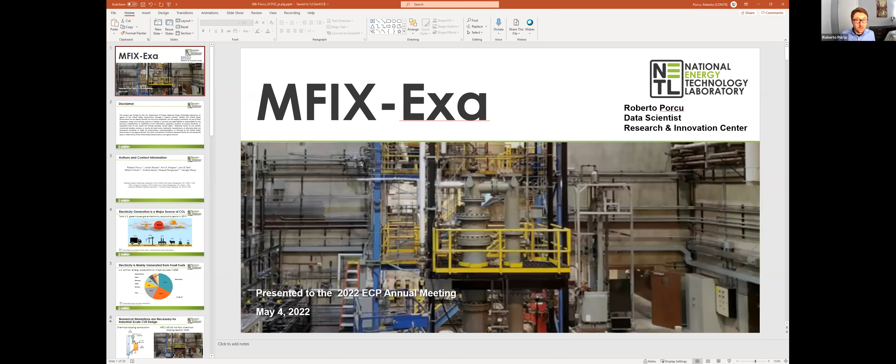Okay, and we'll start. Okay, so hi everyone. My name is Roberto Porcu, and I am a member of the team that develops MFIX-Exa, which is a solver for chemically reacting multiphase flows in complex geometries.

I would first have to say that this project was funded by the United States Department of Energy, NETL, an agency of the United States government, through a support contract. And the views and opinions of the authors expressed herein do not necessarily state or reflect those of the United States government or any agency thereof.

In the work I'm going to present today, I would like to thank Jordan, William, and Deepak from NETL, and John, Andrew, and Henji from the Lawrence Berkeley National Lab.

So to motivate our work, I want to show data from the United States Environmental Protection Agency that shows how back in 2019 - though today the situation is probably much different - one of the top economic sectors for total greenhouse gas emissions in the United States was electricity generation. And in the greenhouse gases, 80% is constituted mostly by carbon dioxide.

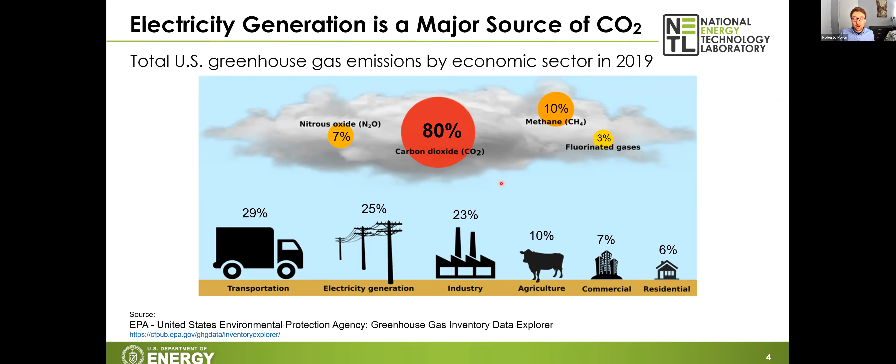Focusing on electricity generation, if we check data from the United States Energy Information Administration, we see that the major sources for primary energy production in the United States come from fossil fuels, mainly natural gas and crude oil, used in power plants. The problem with burning fossil fuels in power plants is that the carbon dioxide produced by combustion is mixed with many other gases, which makes it hard to sequestrate carbon dioxide before it gets into the atmosphere.

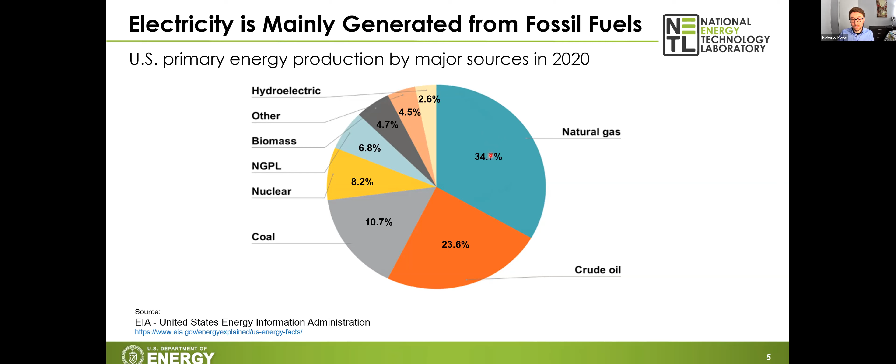So there are some solutions, and one solution is represented by chemical looping reactors. In chemical looping combustion, the carbon dioxide produced by burning fossil fuels in the fuel reactor is mixed only with water vapor. This makes it much easier and cheaper to sequestrate carbon dioxide before it gets out into the atmosphere.

Chemical looping reactors are being developed. We have at NETL a 50 kilowatt hot flow chemical looping reactor. The problem is that when we scale them up to industrial scale, we don't see the efficiency that was expected. So there is still a need for research and development.

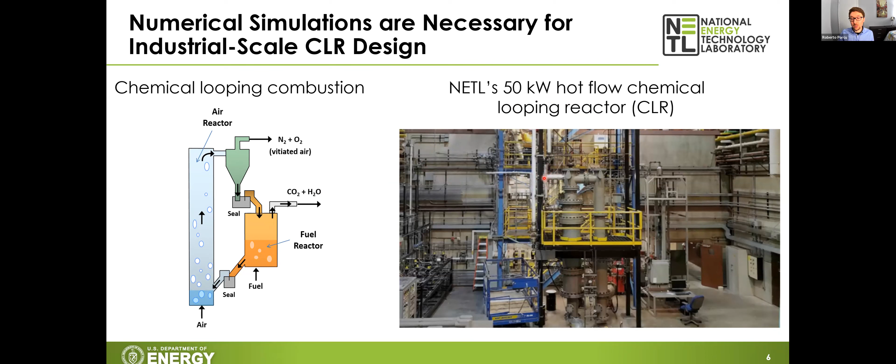And part of the research for chemical looping reactors is represented by numerical simulations, and MFIX-Exa wants to play a fundamental role in this sense. So if we go back to when we started, back in 2017, we were able to simulate a smaller scale chemical looping reactor with cold flow, and a few minutes of simulation were taking a lot of time.

The computational cost was not that big. For example, particle count was about 60 million. But the objective is by 2026 to be able to simulate a few minutes of a real scale industrial chemical looping reactor in a few days on next generation exascale supercomputers. At this industrial scale, the computational cost will be very high. For example, we imagine having hundreds of billions of particles to be simulated. These are estimates, but more or less this is what we expect.

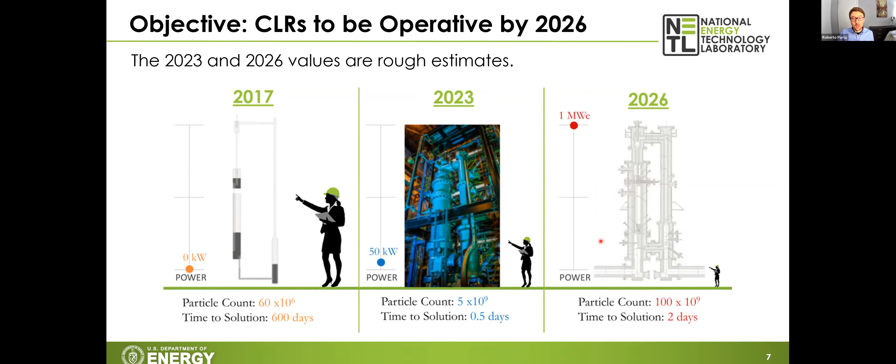So MFIX-Exa is a CFD-DEM code that solves chemically reacting multi-phase flows in complex geometries. We first solve the fluid phase, modeled using a particle unresolved multi-component low Mach number formulation. During the fluid update, particles are kept frozen in their quantities and positions.

Complex geometries are modeled through an embedded boundaries approach. For spatial discretization we use the finite volumes method, and a Godunov scheme for time integration of the fluid phase. We solve a system of equations composed of the Navier-Stokes momentum equation in convective form, together with conservation equations of mass, species mass, and enthalpy. We can either simulate an incompressible fluid or an ideal gas, in either open or closed domains.

After solving the fluid phase, we update the solid phase, aka the particles. We model particles using a soft sphere spring dashpot model, updated in time using a forward Euler scheme with subcycling, so we do several particle time substeps within one larger fluid time step. We solve a system of conservation equations for mass, linear and angular momenta, species mass, and enthalpy.

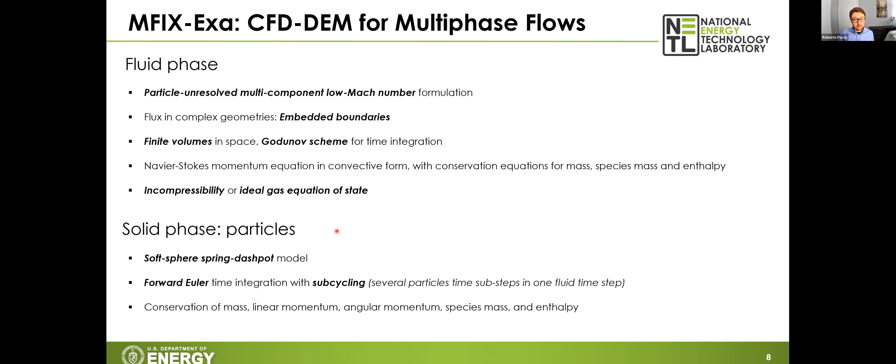MFIX-Exa is empowered by AMReX, meaning we implement a hybrid parallelism approach. That means we have a multitasking plus multi-threading implementation, where the multi-threading typically means we offload the work to the GPUs whenever it's possible.

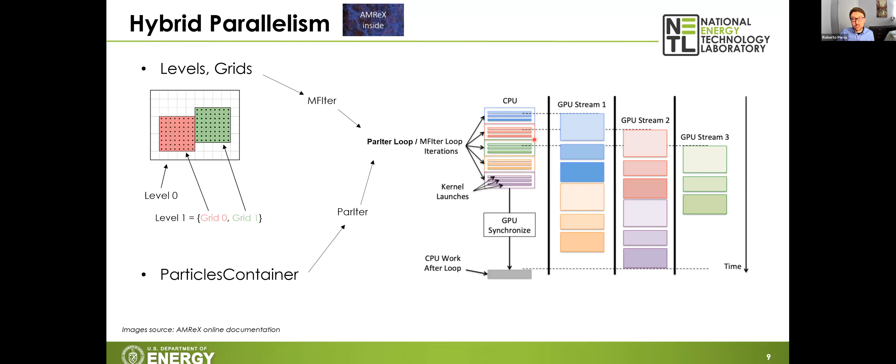AMReX's GPU strategy focuses on launching GPU kernels into multi-fab iterator and particle iterator loop iterations. This means the GPU work is isolated to independent datasets, which can be further parallelized using different GPU streams of execution, giving the possibility to use the GPUs at their best, optimizing GPU usage.

Now I'm going to present some of the improvements we've implemented in MFIX-Exa in the past months and years. In this slide, I'm presenting improvements we made during last year's GPU hackathon, in which we participated. The first change was to pass from an array-of-structs layout to a struct-of-arrays layout for particle data storage.

This greatly improved the coalescence issues we had, because accessing GPU global memory and storing it with a struct-of-arrays layout reduces the problem of uncoalesced accesses.

We also reduced the checks we were doing for particle collisions. What we do in general for checking particle collisions is compute a list of neighbor particles for a given particle - all those particles that lie within a given distance from its center. We check for collisions only with the neighbor particles. This neighbor list is updated every fixed number of subcycles, but in general we only check for collisions with neighbor particles, which of course improves the computational cost since we don't check collisions against all particles, only the neighbor ones.

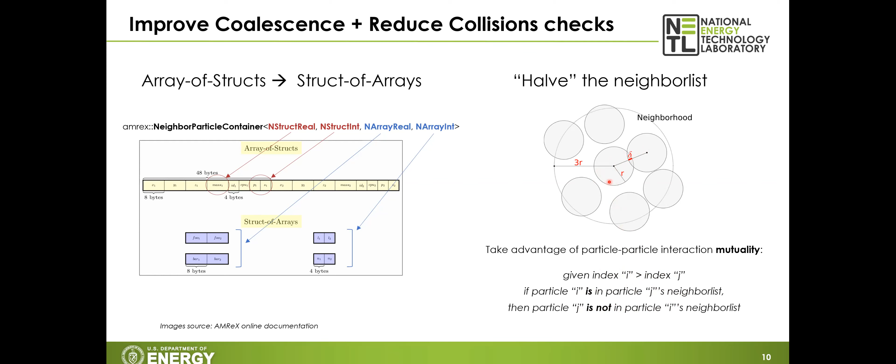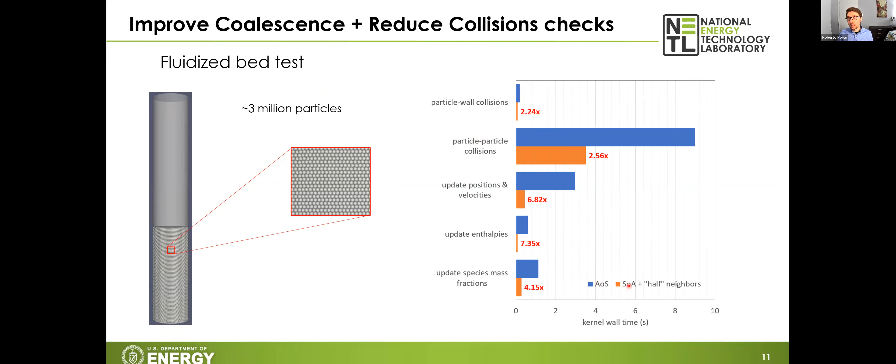This reduces the amount of collision checks we have to do, and putting this together gave us a very good performance improvement. For example, in this fluidized bed test with about 3 million particles on one GPU, we observed very good speedups in all the different kernels that update particle quantities.

In blue is the old implementation, and in orange is the implementation with the two improvements we implemented. In the recent months, Henji implemented two very good improvements as well. Actually, three.

One improvement regards implementation of a greedy algorithm for improving the load balancing with dual grids. The greedy algorithm tries, for the particle grids, to balance particle counts among GPUs while at the same time minimizing the communication between particle and fluid grids.

In this picture, you can see that while we keep the particles local to the fluid grids whenever possible to minimize communication between particles and fluid grids, we also try to assign particles to underloaded GPUs to balance the amount of particles among the GPUs.

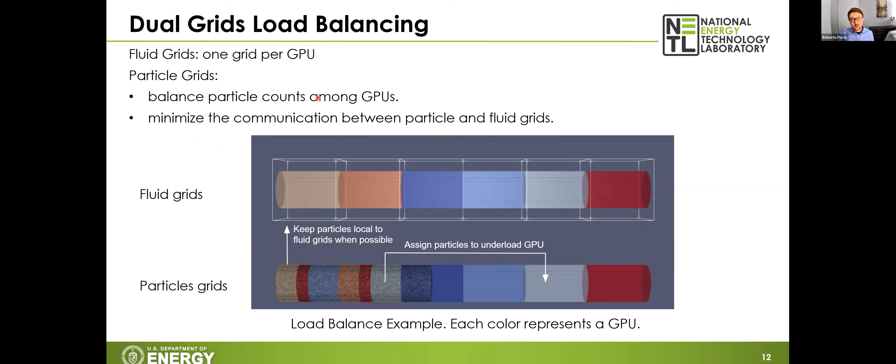So this was one of the improvements that Henji implemented. The other two improvements were actually regarding reducing particle communication costs.

Henji realized that we were communicating all the particles lying inside the ghost regions. Instead, we only need to communicate those particles that are in the ghost regions but belong to the neighborhood of the particles in the destination grid, because we only need those particles to compute particle-particle collisions.

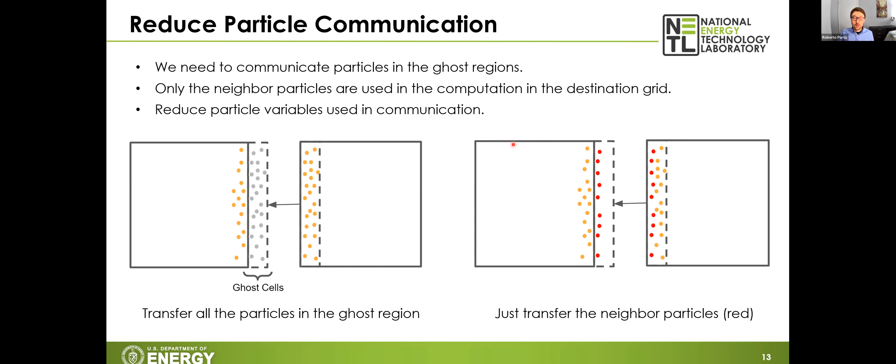This drastically reduced the amount of communication needed. He also found out that we were communicating some variables for particles in the ghost regions that were not used for particle-particle interactions, so reducing the number of variables communicated helped improve performance as well.

He ran a performance evaluation on a riser with 18 GPUs and found that, for example, in the initial configuration where we have only one grid for both particles and fluid, all the particles are in a few cells, so the particle distribution is very imbalanced.

The baseline simulation was showing a very imbalanced computation, communication, and other costs, and it was taking longer than the optimized simulation he ran, where all the different optimizations gave good speedup. The optimization with all three fixes Henji did showed speedup higher than 3.

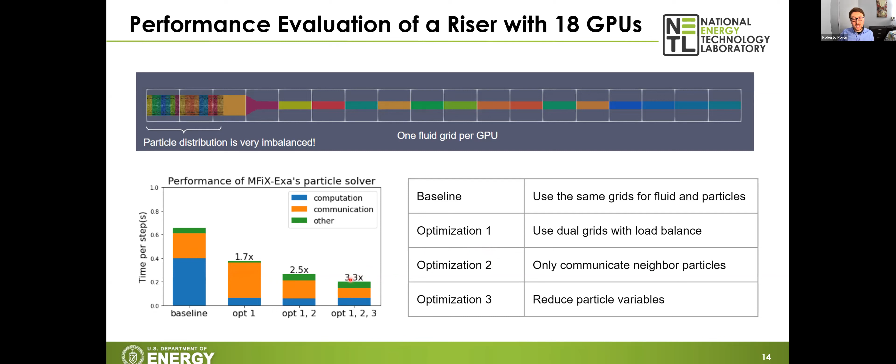Henji's implementation also showed much better weak scaling analysis on both Summit and Crusher. Labeled 22.02 is the version of AMReX previous to merging Henji's implementation into the main development branch, and 22.03 is the version after we merged Henji's changes. You can see how the results on both Summit and Crusher improved, with very good scaling results.

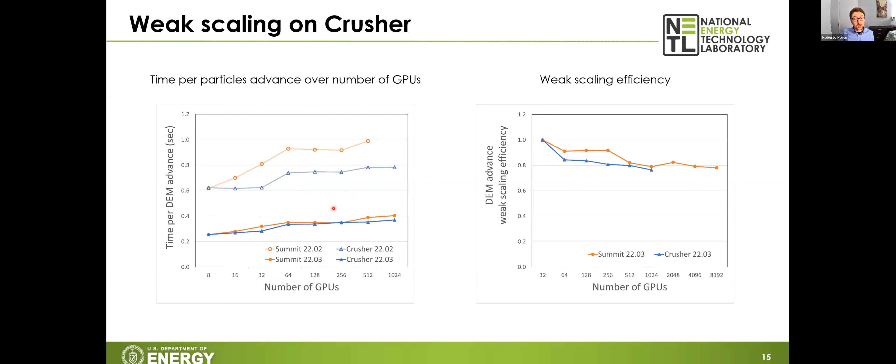Now I'm going to present some numerical results for verification and validation of MFiX-Exa simulations. In this slide, I'm presenting results where we try to replicate the simulations done by Jordan in his work from 2015.

In the left picture, I'm showing the profile of a particle, a water droplet temperature over time. The water droplet is evaporating in a humidified airstream, while on the right we have water vapor condensing on a droplet in a humidified airstream.

In both cases, the profiles, both for the droplet temperature and the energy sources, are in very good agreement with the results shown by Jordan in his paper, and they're also in good agreement for the condensing case with the experimental data we got from the work by Kulic in 1976.

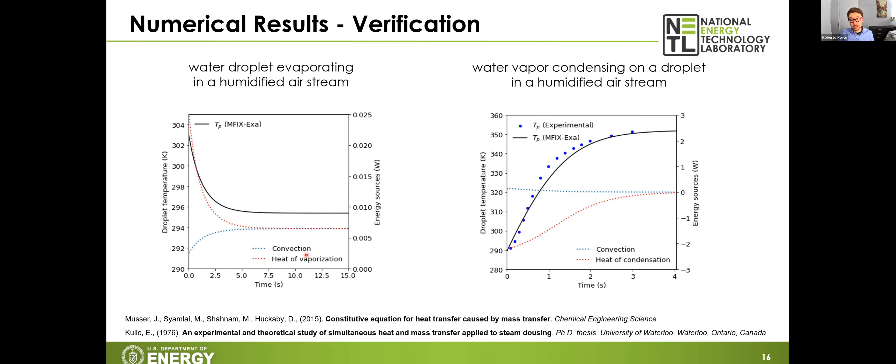Another test for verification was run by William. He got the work from Schumann, who found the exact analytical solution for a monodimensional case of transient heat conduction in packed beds.

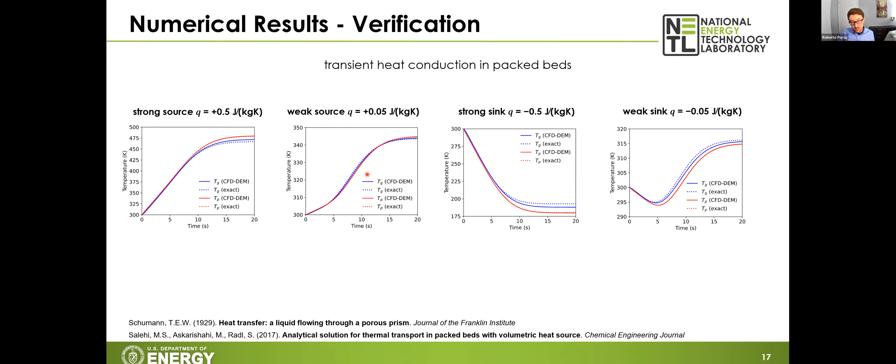Finally, as a validation test, I want to show the results that William ran. He got experimental data from Patil, a test about a fluidized bed. What Patil did in his 2015 work was get experiments of a fluidized bed where the particles were glass beads heated up in an oven, and after reaching a given temperature, they were immediately put in a fluidized bed with a flux of nitrogen cooler than the particles, cooling them down.

You can see for a light configuration and a heavier configuration, where light and heavy refer to the mass of the simulated particles, we observed very good agreement between the experimental data provided by Patil, obtained using infrared imaging, and our simulated values of particle temperature averaged over the entire domain. We observed very good results in this case as well.

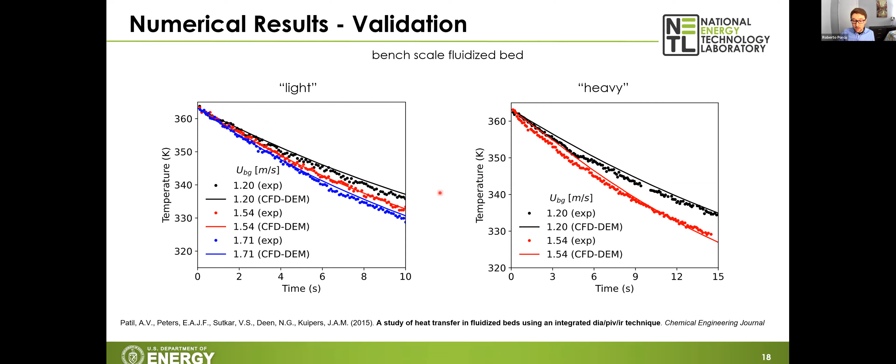So yeah, thank you for your attention, and I'm available for questions if anyone has any.

All right, thank you, Roberto. Yes, I have to stop sharing my screen. Well, you can keep it up in case someone needs to refer to some slides. Does anyone have any questions for Roberto?

A quick one, maybe. Near the beginning, you talked about cutting the search in half by understanding that if you found particle I interacting with J, you'd have to do the reverse. Is that a capability that's now part of AMReX search? Is there an extra special kind of search for that, or did you do something special with the return of the search?

Yeah, that's a good question. When we use the AMReX neighbor particle container, when we compute the neighbor list, we pass a function that computes the neighbors depending on whatever you want. It's a class with an operator that returns whether a particle should be in the neighbor list or not. For example, if the distance of a particle is below a given distance from the center of the other particle, then that particle is in the neighbor list or not.

In the same operation, we can also check if the particle that is supposed to be in the neighbor list has an index smaller than particle I's index. In that case we put that particle in the neighbor list, otherwise we don't. So with this check, one particle ends up in the other's neighbor list, but not the opposite. It's something we did in AMReX, but it's very easy to implement because AMReX makes it very easy to do.

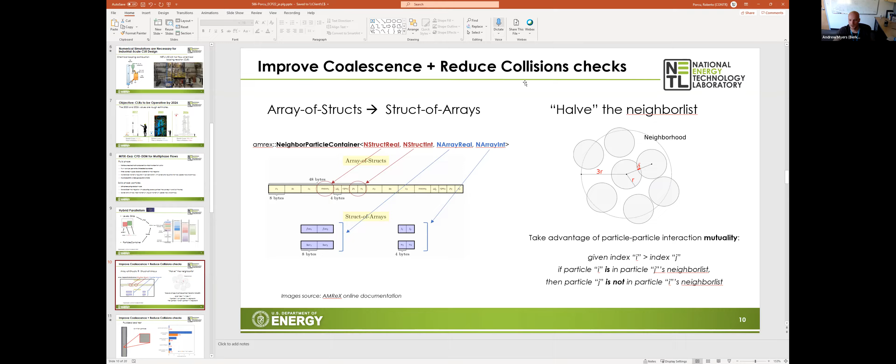Cool. Yeah, any further questions for Roberto? All right, if not, next up is you, Mark. Also, you're muted. Yeah, I think you're muted, Mark. I can't be. Oh, there you go. Okay, now I have to go once a week and be told that I'm muted. I think we all do that, but maybe I get a little bit more. Thank you.

So, yes, I was asked to give a summary of the Pele project, and I was left a little bit to interpretation. I knew that there'd be a fair number of people in the audience that already knew a lot about the application. So I was a little unclear about what to talk about. We'll see how it goes.

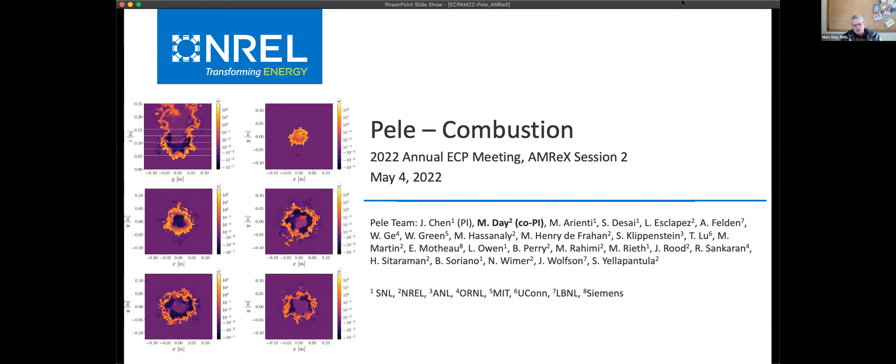First thing is the Pele team is getting to be a pretty large group. Some of these folks worked on the Pele project for just a year or two in the past, and some are just starting up. I don't think that represents how many FTEs are in the project, but just how many people had their fingers in the pie here.

Pele Combustion Suite. Pele is Exascale's application suite for high fidelity detailed simulations of turbulent combustion, both in open and confined domains. The idea was we wanted to create a numerical capability that included enough detailed physics and geometrical flexibility to be able to evaluate the design and operational characteristics of a number of different types of combustion devices for automotive when we first started, but now expanding into industrial and aviation applications.

So in order to do that, we had to target a range of simulation capabilities, which I'll go over by visual aid with the picture on the right. We're trying to include enough physics to be able to inform the next generation combustion technology design. And just some examples of the sorts of devices we're looking at.

The first one is the RCCI, reactivity controlled compression ignition engine, which is part of our KPP2 challenge problem for the ECP project. But also we're interested in things such as supercritical CO2 power cycles, interesting looking rotating detonation engines, supersonic cavity flame holders, and again, more recently looking at aviation combustors for sustainable aviation fuels.

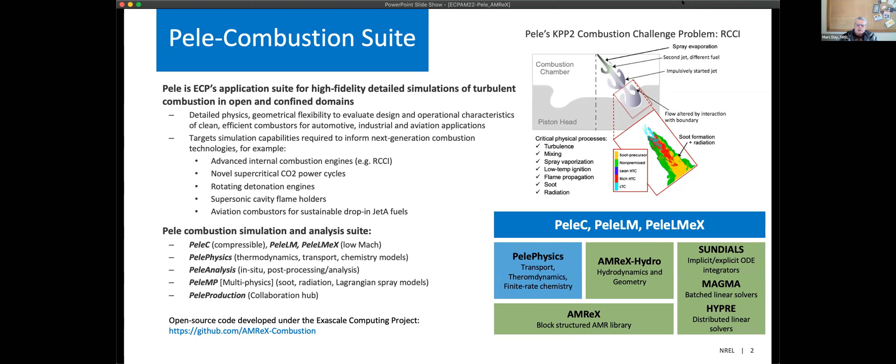Looking at the integrator codes, the simplest of the three is Pele C. That's a compressible flow solver for conservation of species mass densities, momentum, and total energy. It's based on a time-explicit Runge-Kutta variant for diffusion and hyperbolic terms, coupled with the Sundials-driven ODE integration for finite rate chemical kinetics.

Depending on the regime we're looking at, we might want to do an implicit or an explicit integration. Depending on the machine we're operating on, it depends on a lot of factors. We're still trying to quantify which ones are most efficient and which combinations underneath work best. I'll talk a bit more about that in a minute.

Pele Physics will then supply to Pele C everything it needs to actually evaluate the physics models, including the transport coefficients, the equations of state, all that stuff. Then you can wrap Pele MP over the top, which you can use to push particles through the system, and then they might react.

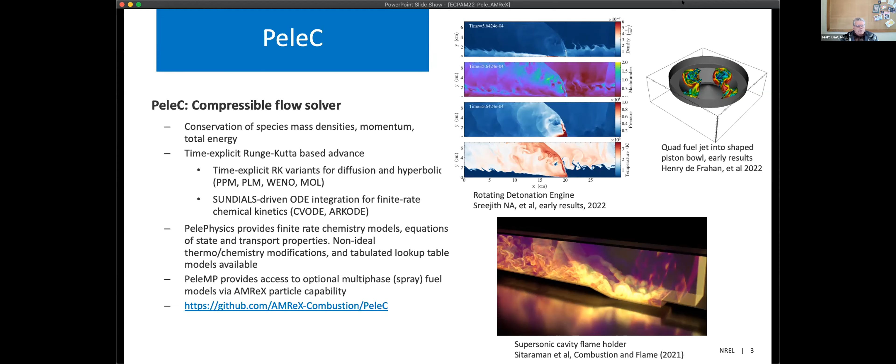Pele LM and Pele LMeX are written like that because they're both very similar codes. LMeX was derived from LM, but they're different in a key way. Both solve the low Mach number flow equations for conservation of mass densities, momentum, and enthalpy. The larger time steps enabled by a low Mach number approximation require more attention to the coupling between diffusion and reactions. So we've devised an iterative implicit spectral deferred corrections variant of a time stepper.

We couple these things together nicely when we take big time steps. Time steps are big enough that we can't do explicit diffusion anymore, so we do a Crank-Nicholson-like step. The hyperbolics are based on BDS, Godunov stuff, and I'll make a comment about what BDS stands for and its purpose in a minute.

The chemistry is again driven through Pele Physics, using Sundials to integrate the equations. More often than not, the time steps are big enough that we have to do an implicit scheme in order to get the chemistry to solve in my lifetime. You end up taking hundreds of thousands of time steps, and if you have to do it explicitly, that'd be bad.

The critical aspect with Pele LMeX, and the reason there are two lines of development, a low Mach and a compressible version, is that to integrate the low Mach number system, we have to solve a linear elliptic system to get the projected or constrained velocity field that satisfies a spatially constant pressure field. We also have to solve a set of linear systems to do the implicit diffusion solve. So Pele LMeX turns out to be a lot more complicated than the compressible version because it involves solving these linear systems.

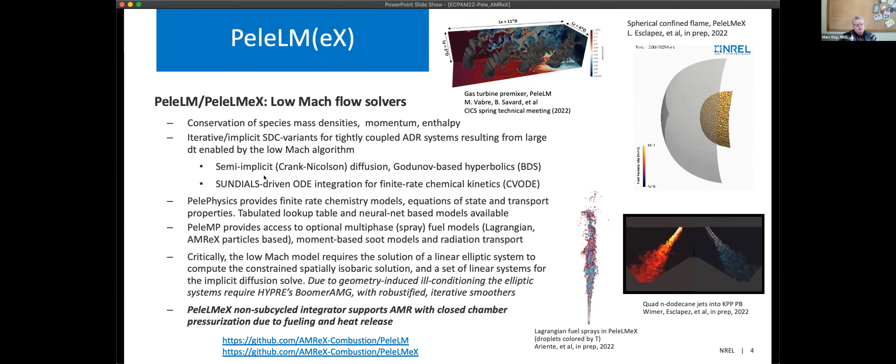We could run problems where we're injecting sprays into a closed domain with a funny shaped piston head. The jets go into these things and mix, doing some nice turbulent mixing. So we have a lot of the components in place, and now it really is about scaling the system up, robustifying the linear solvers, and getting all the pieces to hang together. So those are the three main codes.

I'll give a couple more comments about Pele Physics, which talks to all three of them. Pele Physics is itself an open source combustion physics library. It has everything necessary to get the behavior of the gas system from the equation of state. The equation of state might be an ideal gas mixture, a non-ideal one for looking at supercritical flows, or even EOS lookup tables. Pele Physics supports them all, and the codes that use it support them all.

Transport coefficients can be mixture averaged, which is typically the model we use. We're interested in, say, hydrogen diffusing faster than some heavy species - that makes a difference in how our flames propagate, and we want to be able to capture that. But then there are simplified models like a unity Lewis number transport property where there's no variation over space.

So there are various simplifications. And finally, the chemical reactions themselves, finite rate chemical expressions, are typically specified in the combustion community using this Chemkin formalism. We have a Python code generator that spits out code that builds on CPUs or GPUs for efficient evaluation of those.

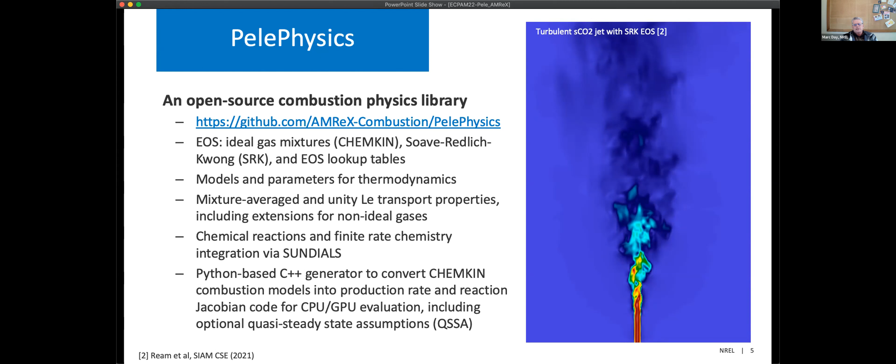This includes the ability to handle things like a quasi-steady state assumption, where some species, instead of satisfying ODE expressions, satisfy algebraic expressions saying their creation rate equals their destruction rate. So the concentration of one of those species becomes an algebraic relationship you carry through the evaluation of the rate term - a nice way to reduce the dimensionality of the system by making approximations to the chemistry.

I made reference to lookup tables and other ways to evaluate equations of state and chemical reactions, and here's why one might want to do such a thing. In many chemical systems, the dynamics might involve hundreds of chemical species, but when you look at the dynamics of the system, it turns out you can pretty accurately describe them with a much lower dimensional chemical space.

The coordinates of those chemical spaces are often some linear combination of the normal variables you would use. Instead of evaluating very complex finite rate chemical reactions, you can store the relationship between the bases in this reduced manifold space and the effective production rates. You can store that in a neural net.

The use case here would be: you do some very complicated, expensive simulation, but keep track of the data involved. You could store the chemical space accessed during those runs in the form of a very reduced neural net, and replay those calculations with maybe different boundary conditions. As long as you don't go too far from where you did the original calculation, you can redo these calculations in a much lower dimensional space, 2 or 3 dimensions rather than say 100 dimensions. So there's good advantages to that.

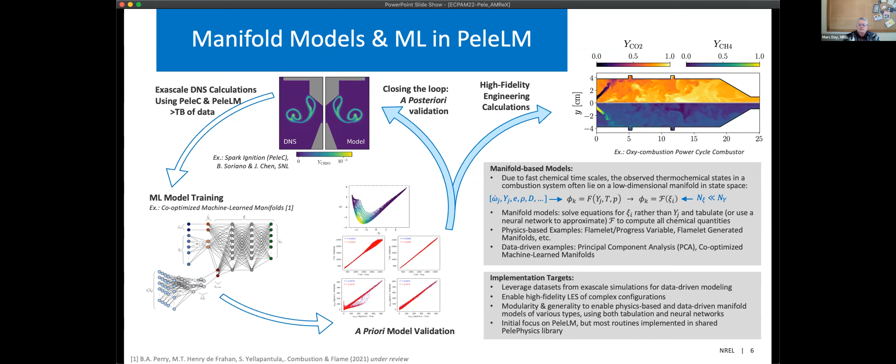This is going to become useful post-ECP, when we have to do a lot of engineering calculations in parts of the domain of parameter space that are fairly limited, but we need to do a whole bunch of iterations to do optimization and things like that.

Anyway, back to the code. The numerical methods used in Pele are similar to a lot of other AMReX applications. We extensively leverage the AMReX library, including the data structures, the communication patterns and tools, the description of how parallelism is handled, and in particular how the GPUs are accessed.

All of our discretizations are based on cross-refinement finite volume methods to conserve mass and energy.

We talked about the subcycling. Pele C and Pele LM subcycle in time to maintain typically a constant CFL across the AMR hierarchy, whereas PeleLMeX tends to run with a single time step across the hierarchy. They have different advantages to the algorithm, namely the low Mach number code's ability to handle closed chambers.

I mentioned in passing earlier that the Pele analysis suite contains some tools. Here's some examples of what they are. They're typically AMR aware, so they understand how the grids are nested and the high dimensional space. They provide tools to extract isosurfaces, slices, streamlines, stream tubes, to be able to incorporate high dimensional sampling and statistics, to do some analysis in the chemical space, including CEMA, which is chemical explosive mode analysis.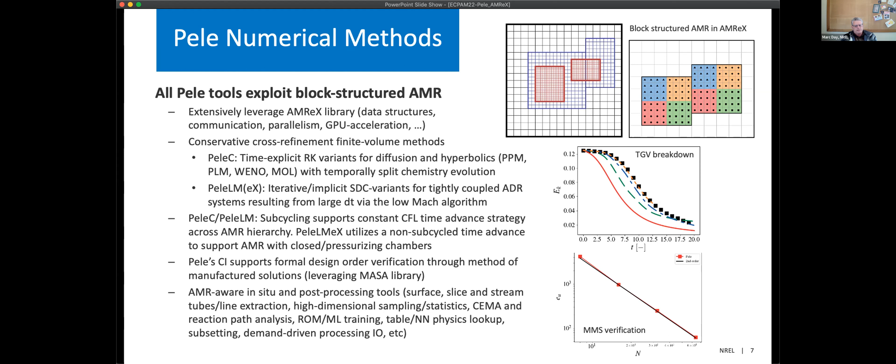I made reference to the geometries being incorporated with AMReX's embedded boundary stuff. In general, AMReX provides functionality for arbitrary domain boundaries, internal and external, in 2 and 3D, providing some tools to generate these things: some simple shapes, more recently some constructive solid geometry, ways to pull things out of CAD packages and create geometries from that, or create surface meshes and use that to create AMReX's description of the geometry.

Those last 2 things are in development, in testing, and eventually will be a critical part to us being able to apply this post-ECP to more complex general situations.

But other than the generation, you have the data structures, augmentations to the logically rectangular stuff that normally comes with block structured AMR, but the augmentations allow you access to things like the apertures of the faces, how much is exposed to the fluid versus how much is covered, and also abilities to create numerical PDE operators like gradient and divergence and such. This is all kind of standard AMReX stuff.

In these cases, what happens is, as shown by the picture, as mentioned in earlier talks, the regular cells are cut or completely covered by the EB, and the corresponding stencils have to be locally modified near that boundary to account for partial obstruction of the faces, partial obstruction of the volumes.

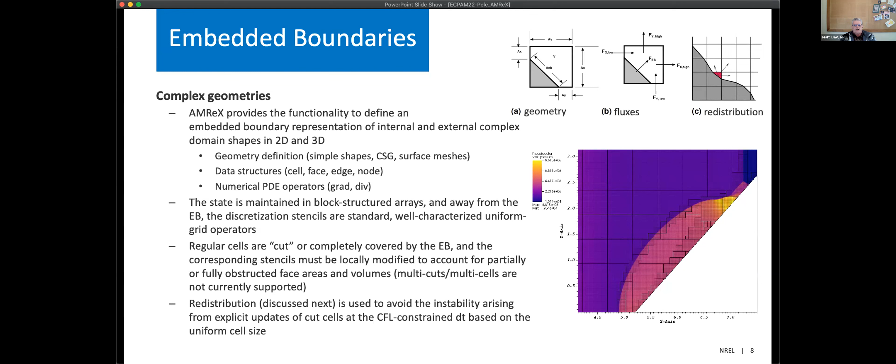Redistribution turns out to be a really important aspect of this because those cut or small cells will have an instability for time explicit integration of things, when you're trying to time step at a DT that was based on a CFL constraint that was based on the full cell. So if you get little tiny cells, you're going to have instabilities, and redistribution is a way to manage that. So I'll make a couple of comments about that.

Again, redistribution is used to robustify the conservative update. So what you do is you involve the small cell and a couple of its neighbors, so you end up getting kind of a bigger area to work with. It has a way of helping you get around the instabilities, but it also involves a bit of art. So you have to decide, when you do this redistribution, which cells do you want to involve in such a procedure, and how do you want to weight the redistribution of mass or energy to do this.

AMReX provides a number of different methods they have over the years. I think they're narrowing down, but specifically for the combustion application for complex reacting flows, we find that we're evolving mass fractions, and we need those mass fractions to stay between 0 and 1 during evolution, or we're in trouble. So sometimes if you're doing kind of a gamma law gas or some idealized system, maybe you have overshoots and undershoots, maybe you can just clean them up. But in the combustion problem, we have to evaluate transport coefficients, thermodynamic properties, chemical rate expressions.

We can't do that. In addition, the flux interpolation and limiters and some of the other things down in the bowels of the AMReX redistribution schemes could introduce or compound these bounds violations, and that would just essentially make our code crash. So the Pele team has worked extensively with AMReX to develop and test redistribution schemes that preserve these constraints. So it's important to fix those at boundaries.

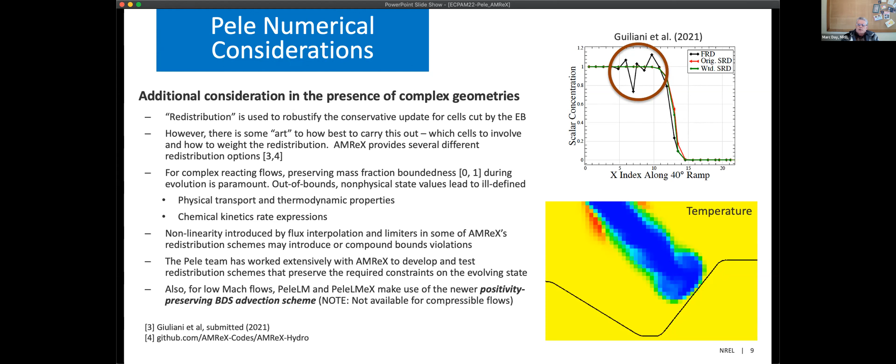So a lot of the work over the last year has been to address this issue and make sure that we can have a nice, robust evolution of our state, no matter how complex the geometry.

I don't want to say much about moving the AMReX codes to CUDA and to GPUs, except to say that in Pele, we spent a fair amount of effort investigating a number of different approaches to doing this, involving things like OpenMP and other strategies of mixed language implementations, trying to minimize as much work as we had to do. Ultimately, for a number of reasons, it turned out going the AMReX lambda-based approach to launching kernels turned out to be the most efficient, turned out to be the most easily readable and maintainable code, and it let us get rid of the multi-language implementation and go to an all C++ framework like most of the other ECP applications of AMReX. So it's turned out to be a big win for us.

Now, let me see where I'm at here to probably get really close to time. We just want to make some comments about the current status of the scaling.

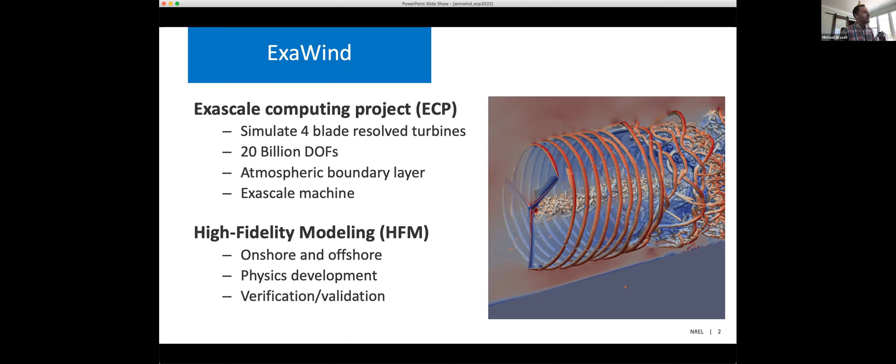So what is AMR-Wind? AMR-Wind was forked from incflo in spring 2020, and it's very similar to IAMR - these are all AMReX codes. They rely on the block structured AMR in AMReX, the performance portability that gives us, and also MLMG. Because we solve incompressible Navier-Stokes, linear solvers are very important to us, so having a scalable, robust solver is good for us.

After we forked it, we started adding stuff to make it different. One of the first things was atmospheric boundary layer physics - things like the Coriolis term and Boussinesq buoyancy and wall models, stuff like that. We've also added actuator lines, multi-phase flow, immersed boundary method, and then this hybrid solver, where we combine AMR-Wind with Nalu-Wind through overset using Tioga.

The AMR-Wind discretization mostly comes from a 1998 paper from Ann Almgren, a JCP paper. It's an approximate projection scheme - the velocity and scalars are all cell-based and pressure is node-based, and it's also staggered in time for pressure. It's discretized using a finite volume method and a Godunov scheme for advection. We also have a WENO-Z variant that we typically use.

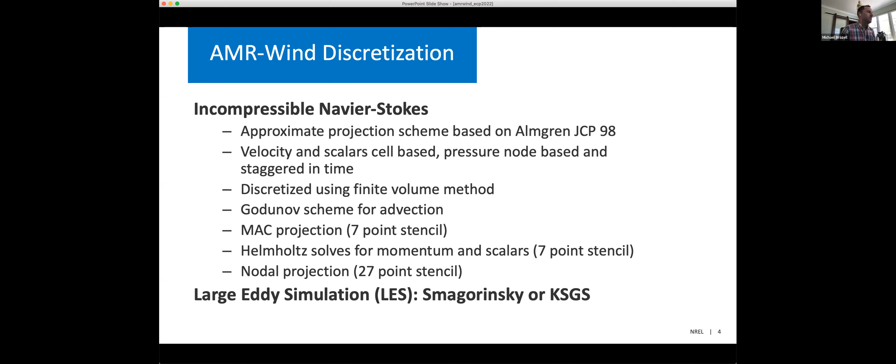Because we're solving incompressible Navier-Stokes, we rely on three types of linear solvers: the MAC projection, Helmholtz solves for momentum and scalar - both 7-point stencils - and then a nodal projection, which is a 27-point stencil. These all come through the AMReX library. In addition to incompressible Navier-Stokes, we can also solve large eddy simulations, either through the Smagorinsky model or by adding an additional equation and using KSGS.

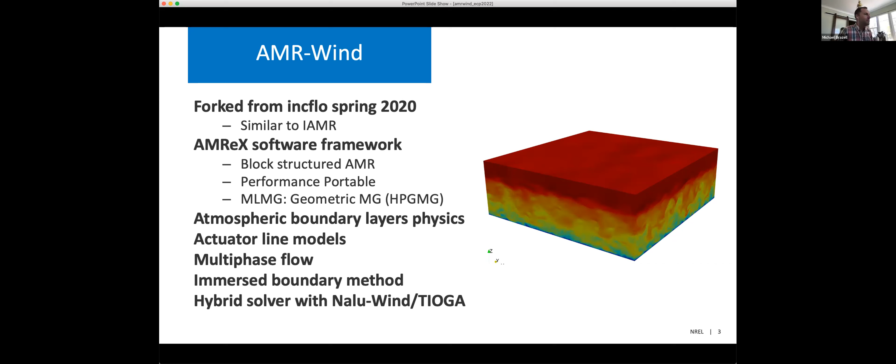What's nice about this case is we compare AMR-Wind to Nalu-Wind to SOWFA and to that Peterson paper, and we have pretty decent agreement. These cases are kind of hard to get good agreement on just because they're large eddy simulations.

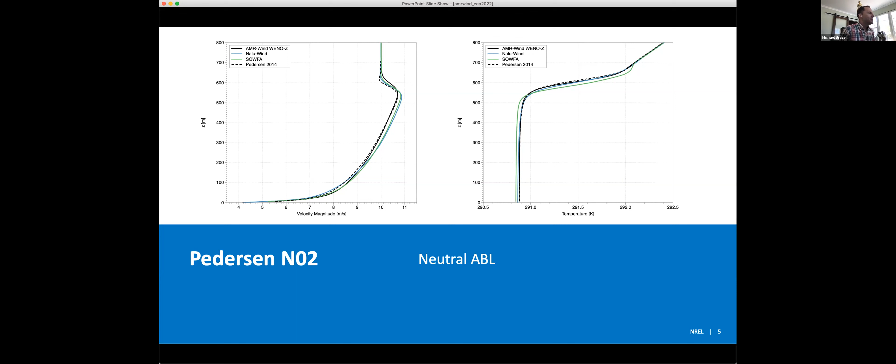Here's a different case we work on a lot, called GABLS. There's a great website I put here, it has all kinds of data from tons of codes. It's really good to compare to other codes.

This is kind of similar, except for this case you start with a temperature profile that varies linearly, and then you cool the ground as the simulation goes on. You can see temperature has an effect on the simulation, and that's partially related to causing this nose to happen. You can see, maybe 200 meters up, this nose.

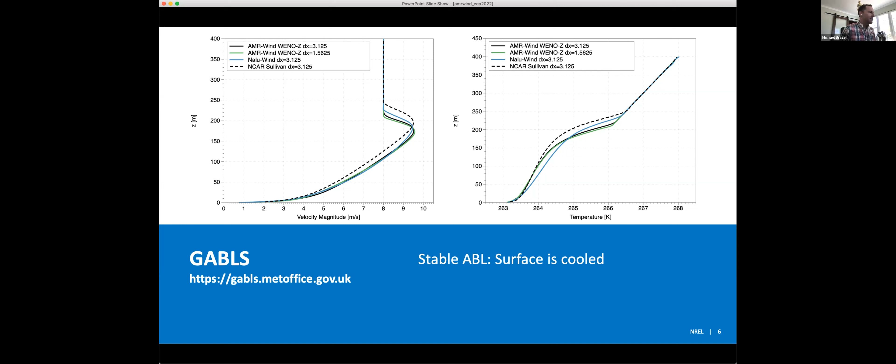So the flow goes faster than the free stream flow that we started at. That's kind of interesting.

We also recently have some multi-phase work, so we added some movies. Movies are always good. Here's a dam break problem. A lot of this work's been done by Yorgos and Michael on the ExaWind team.

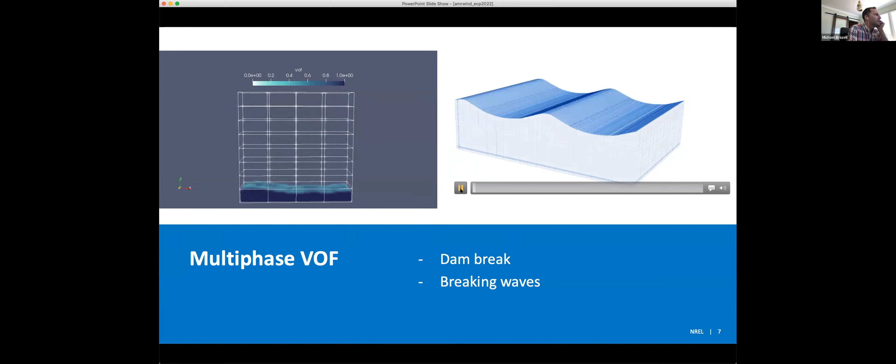This multi-phase work is going to be important later when we start doing offshore wind energy, coupling everything together.

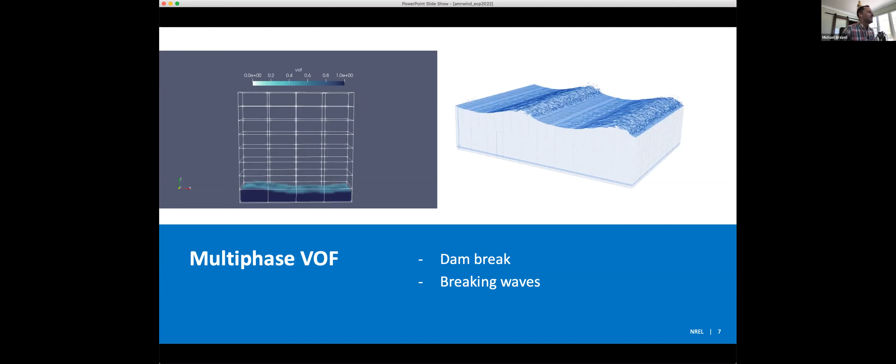I'll quickly talk about some strong scaling. This plot's kind of old at this point, but I still like it because it has two problem sizes, and it has GPUs and CPUs on Summit. You can see that if you do a lot of degrees of freedom per GPU, you get really good speed up compared to CPUs. But when you strong scale them all out, we're still a little bit faster using CPUs. There's just not enough work on each GPU.

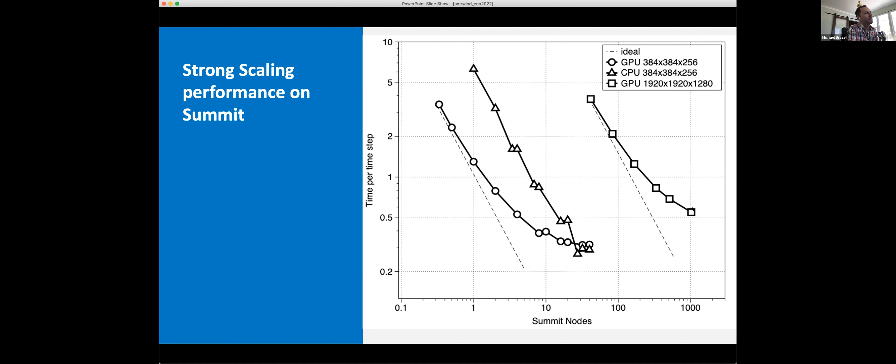This is a fairly big problem out here too, so that's kind of nice to see strong scaling is looking okay.

Here's an improvement over the last year. I just went back a year from April, so new is this past April, and old is April 2021. I changed three things. It's kind of hard to say which had the biggest impact, but of course I updated AMReX in that year.

We also realized, with the collaboration with CEED, that they were doing a different solver for their momentum solves, and they said we should try it. It turns out it works pretty well. We run such a small time step because we're trying to do large eddy simulation, that using MLMG, like a whole V-cycle, is overkill for these. So we've switched to Krylov solvers and just set the max coarsening level to 0, and that's led to some speed ups.

We've also gone from a tensor solve to a multi-component solve, which was just a little tiny speed up. But all three of those things gave us a 1.3x speed up, so that's pretty nice.

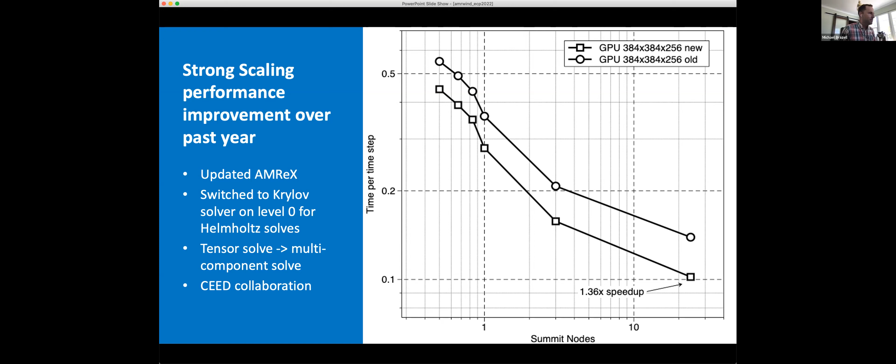Now I'll talk about the hybrid solver. What we mean by that is we're connecting multiple codes through Overset. You can see this picture here: we've got a background grid, which I'll sometimes call the off-body, and then we've got the near-body grid.

That could be stretched and it could be unstructured. So typically we'll put Nalu Wind, which is our unstructured code, there, and then we'll put AMR Wind on the off body. The reason we use overset methods is it makes it easier to handle rotating geometry, like wind turbines. And then we use Nalu Wind as our near body solver.

It can handle complicated geometry, anisotropic mesh, mixed elements, and RANS models. And then AMR Wind, which I've been talking about, we put in the off body, and that handles atmospheric boundary layer and wakes. You can also turn on mesh adaptation and track the flow.

So TIOGA is what does this overset mesh connectivity. It's an open source library that anyone could use. And then to get this to work, there were some modifications to the AMReX linear solvers, and these are in AMReX, so anyone can use this, but you can specify internal Dirichlet boundary conditions to the domain. And that's necessary when you pass the solution across from both solvers, you have to enforce some boundary conditions.

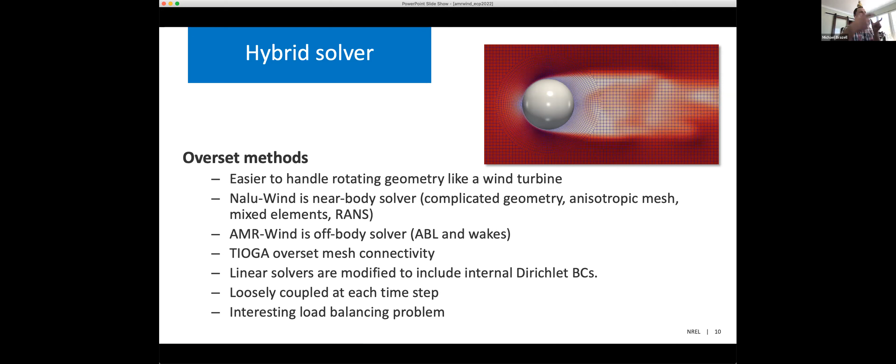All right, so now I'll show off some of the overset simulations of wind turbines. These days, we're still relying a lot on just static mesh adaptation. So typically for an atmospheric boundary layer, we need mesh resolution of about 10 meters, that's on the outside of the domain. Then where we connect to Nalu Wind, we're at about 0.1 meters, that's pretty typical. And then the Nalu Wind mesh will go down to Y+1, so let's say microns. So we really have a really wide range of scales that we're trying to simulate.

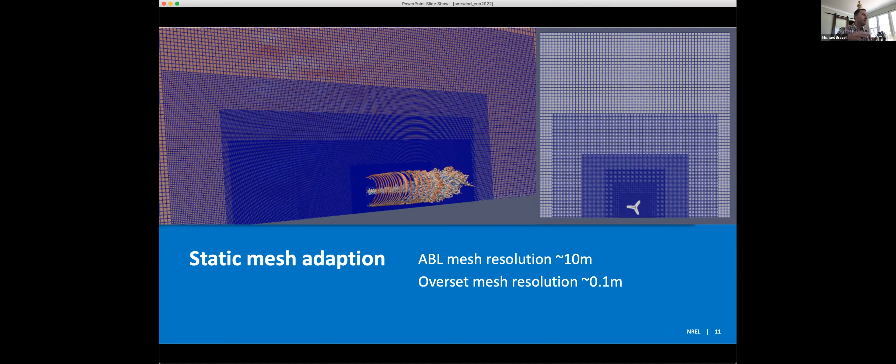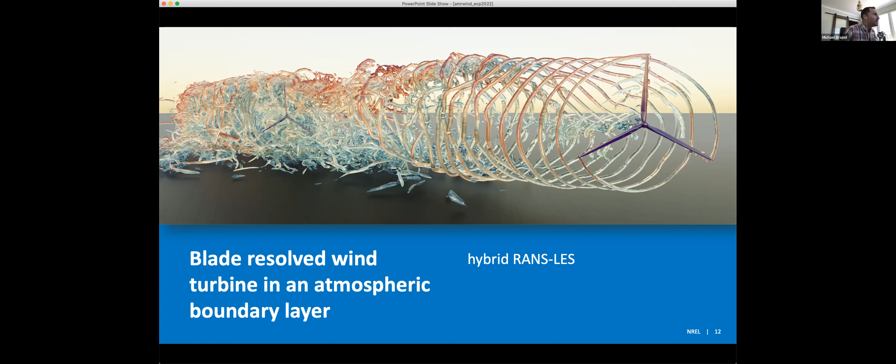Here's one of our latest simulations. This is a hybrid RANS LES simulation. There's 2 wind turbines, and it's in an atmospheric boundary layer. That's pretty exciting. And then we have a movie version of this.

We haven't really done too much with dynamic mesh adaptation because in these large eddy simulations, it's kind of hard to know what to tag. It just kind of turns into a mess of vortices. So we've been mostly sticking to static mesh adaptation for now.

Let's let that finish.

All right, do you want to take over, John, on this slide? Sure, I'll finish up the slides and mostly talk about things like crusher status.

Yeah, I feel like we're only giving everybody probably like 10% of this project because there's a lot more to it. We're going to move to offshore stuff in the future. And honestly, AMR Wind is a little bit vanilla compared to a lot of the rest of the talks here, except for, we're doing wind and water in there with volume of fluid. And I feel like one thing that's really unique to our project is the coupling to Nalu Wind that's doing an unstructured solver. So yeah, I'll talk a little bit more about the hybrid turbine simulation status.

I thought maybe it'd be interesting to give an idea how close I feel we are to meeting our KPP. AMR Wind, since we branched off of IncFlo, we were kind of already set on the path to easily run on GPUs right at the start of using AMR Wind, so we can run on NVIDIA, AMD, and Intel GPUs pretty easily.

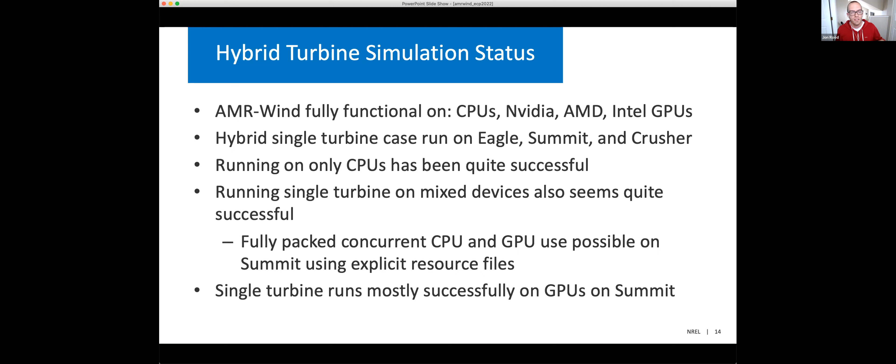And we've also run the single turbine case on Summit on all GPUs—so Nalu Wind on the GPUs as well as AMR Wind on the GPUs. Can you move to the next slide?

So there's a little matrix that I put together showing kind of the status that we're at. The single turbine we're doing pretty good, 2 turbines on the CPUs, but we're ultimately working now to try to get this 4 turbine run to work. And now it's kind of at this turning point where we have the CPUs, but we don't really have a machine that we can run the 4 turbine case on with enough CPUs to do it.

So now we're using Summit and trying to really do the turbine simulations on the GPUs. And I still don't fully understand—we're not using a totally MPMD situation in our code.

We have the ExaWind driver, which is a C++ code, and we're just attaching all these libraries to it. It doesn't really act in the exact same way as when you run these codes separately, and we're still trying to figure out all that stuff as we go along.

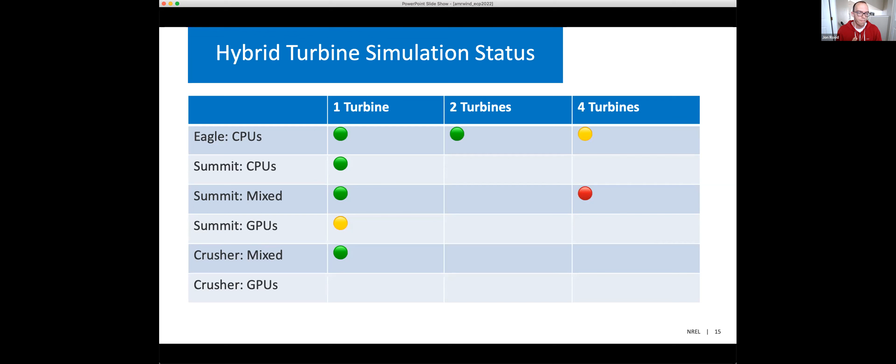So yeah, we're just kind of working on the 4 turbine case, which is like 20 billion DOFs, 10 billion DOFs in AMR Wind. So it's a pretty big simulation. Can you move to the next slide?

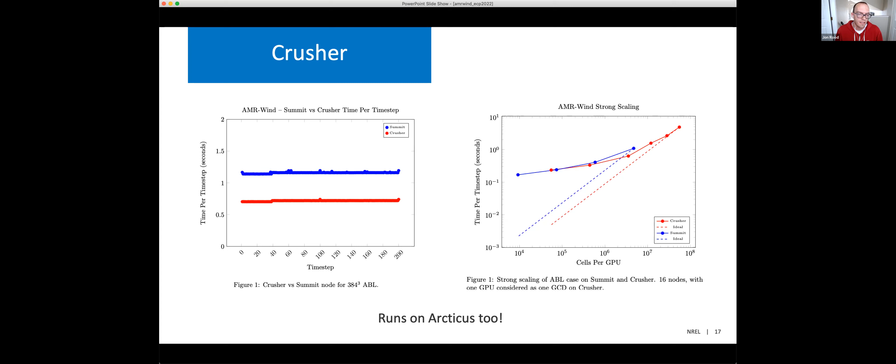Do you want me to do this slide, or do you want to do this? Sure, yeah, I can just jump in if you have anything else to say, but you can finish.

Okay, so just a quick conclusion. We showed some strong scaling performance and some small improvements. We have validation on atmospheric boundary layer problems. We showed some hybrid solver results, including blade resolved simulation of a realistic wind turbine, I guess 2 turbines we showed. And we're fully ported to GPUs and run on Summit, Arcticus, Perlmutter, and Crusher.

I'll jump in and just say one extra thing about Perlmutter that maybe is interesting to other people. We just see about a 20% speed up from a V100 to an A100 in AMR Wind, if anybody's interested in that. We get a speed up, but it's 20% or so.

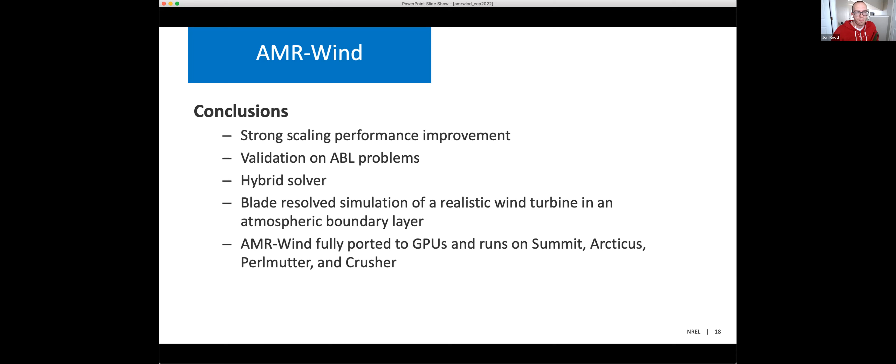Right, and then final slide. So some future work: always improve scaling and performance. It'd be nice to get the hybrid solver completely on GPUs, even though there's a chance we may not run it that way, but just having that ability would be nice.

Focus more on offshore wind energy, so get our immersed boundary or EB capability ready to go for those kinds of simulations, multi-phase flow, and then whether or not we're going to use actuator lines or the hybrid solver for offshore, or maybe both at the same time.

We hinted that there's some interesting load balancing, so we want to investigate that more and see where we can go with that. And then turn on dynamic mesh adaptation. The figure on the right, we turned this on for this ellipsoid problem we run, kind of like a fake one-bladed wind turbine. It does work, but we just haven't really pushed it too much in that direction yet, so it'd be nice to put more effort into that.

John, do you want to talk about the ZFP? Yeah, I feel like that's my thing. I know it's possible, but I've really been trying to get ZFP to work in plot files. I added HDF5 support to AMR Wind. I really just think it'd be a cool gap to fill, to have it working between in situ visualization and just uncompressed plots.

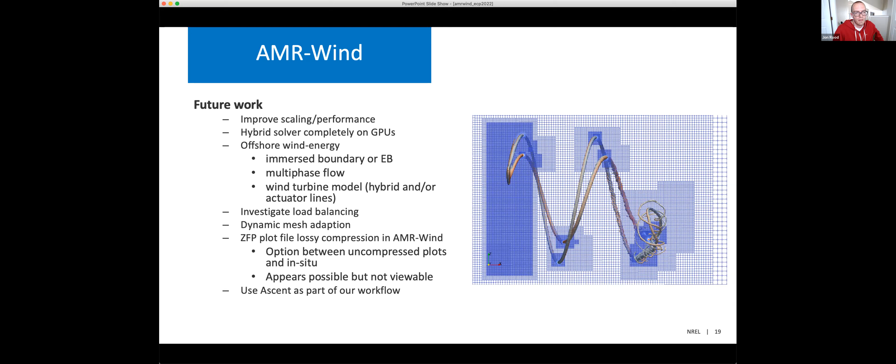All right, I think that's it. Any questions? I'll put it back on the movie.

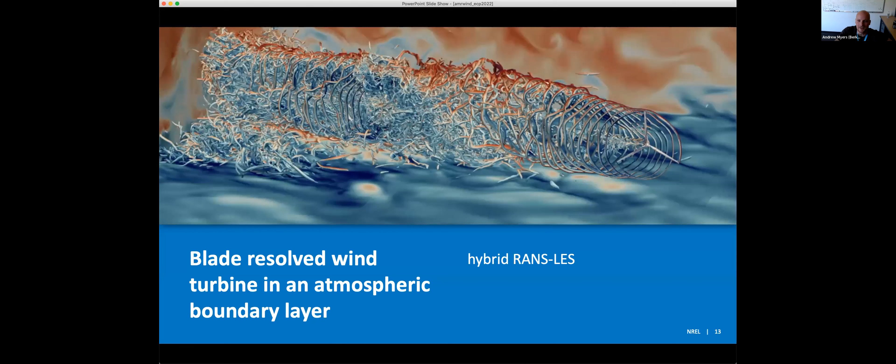Mike, you showed one of those scaling plots earlier, sort of mid-talk, where there were a couple of dots next to each other, then it would drop down a little and have a couple next to each other. Do you know what I'm talking about? This one, the triangles? Any idea what's up with that?

Yeah, this is just a load balancing thing. It probably cut the domain up into the same number of blocks, let's call them. So when you added more nodes, it didn't really help. Similar to what's happening in the circles down below it, you think? Yeah, exactly. All right, that's it. Thanks.

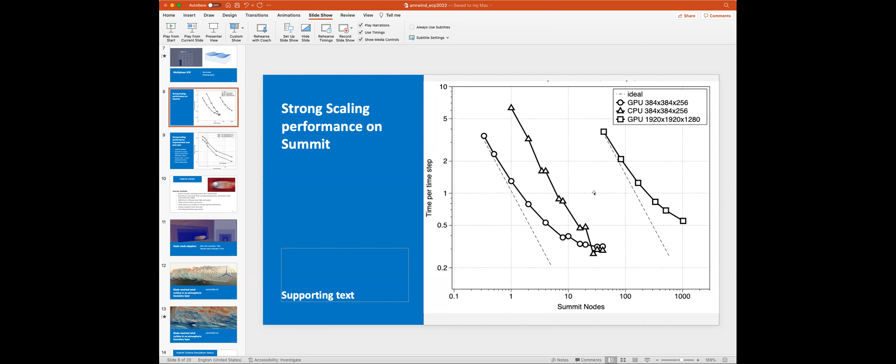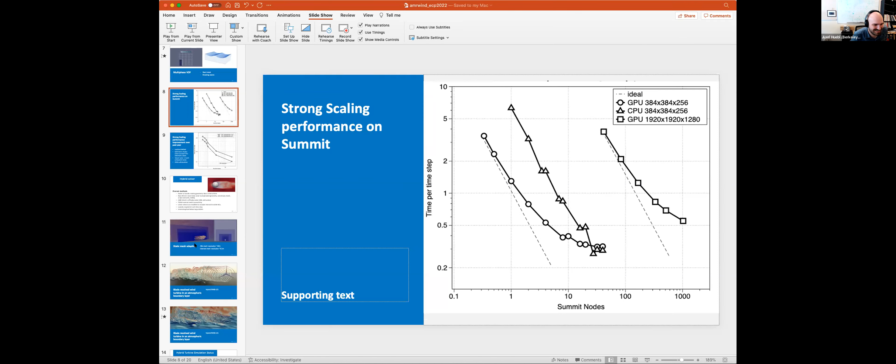It's either vorticity or Q criterion, so an isosurface of that. We call it an ellipsoid, but it's just kind of a flattened long ellipsoid. So it kind of looks like a turbine blade, but without a blade. Oh, the turbine blade is not shown, okay, yeah.

On the left side of the domain, the flow comes in, and while it's spinning it creates these vortical structures, kind of like you can see in the wind turbine here. So it's kind of the same. You get three of them when you've got three blades. And with one blade, you get one on the inside and one on the outside. The turbine's inside ones are very small because the hub does something to those, but if there were gaps you could see an inside vortex too. It's kind of cool.

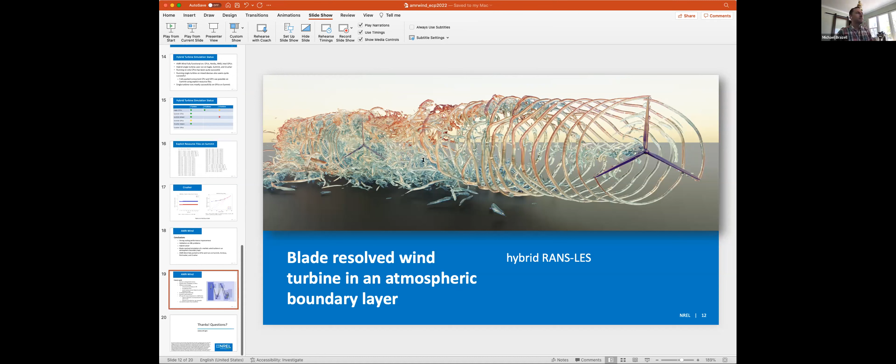Is this like a standard thing you visualize and analyze because it affects the next turbine if there's too much vorticity still? What's the science hinted at behind that? This just had uniform flow, so it's pretty easy to find a Q criterion or vorticity and make an isosurface, and it looks pretty.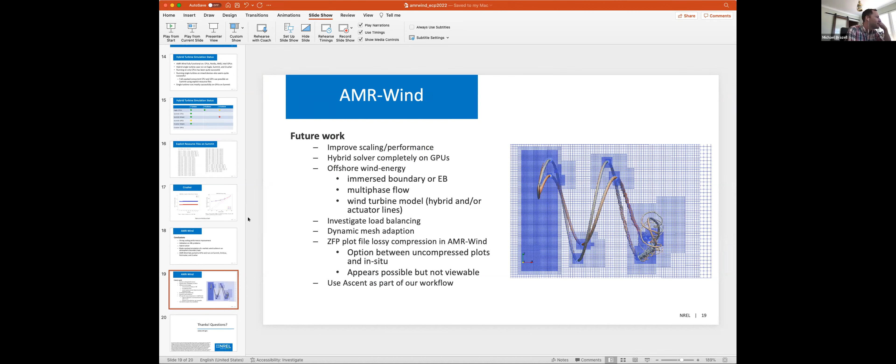But as soon as you do that for one of these, it's harder to tell. What you said is correct — the wakes hit each other, and then you get less power from the downstream turbines. Yeah, that's pretty much it.

Cool, thanks. I guess if you looked at velocity, like a slice of velocity, you could see maybe a wake deficit — that'd be another way to visualize the wake, versus the Q criterion vorticity. Yeah, because it's all mixed up, it's a little harder to tell sometimes, especially once we get more turbines in there — it'll just be a vortex soup.

Just curious, not to beat a dead horse, what's the color here? Why is it red on top and blue on the bottom? Huh, that's a question for Nicholas, I think he made this. Okay, I can look at it. Yeah, I'm not sure, I'd be guessing.

I'm wondering if sometimes isosurfaces of velocity magnitude kind of look similar, or maybe one's a positive vorticity and one's a negative. I'm not sure, the ABLs are always like red on top. Oh, you mean this red and blue? Or is that what you mean, the vortices shed from the turbine?

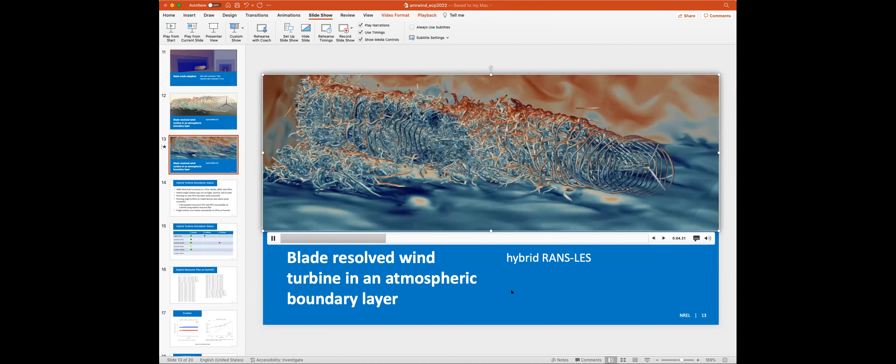I want to ask another question if I can. John, can you say a few words about how you manage running the code on CPUs and GPUs at the same time? What does the code's controlling structure look like to do that?

It's pretty easy actually. We don't use MPMD, we're not running two applications at the same time. We have a driver that you compile the code with, just like we include Sundials into PeleC or something. The driver compiles in and links to AMR Wind, and it links to Nalu Wind. And when we run it, we basically decide whether or not we want to overlap Nalu Wind on the same rank as the AMR Wind ranks, or we can separate them and run them explicitly.

So we can have basically all the set of AMR Wind ranks on the left side of the COMM world, and all of the Nalu Wind ranks on the right side. And if you just run that in JSRun or Slurm or something, you would basically have everything for AMR Wind on the left side and everything for Nalu Wind on the right side. So that's why I showed those explicit resource files, where I take every single rank in the world and place it exactly where I want it on the system.

On Summit, I even place things on the cores closest to the GPUs - I put all the AMR Wind ranks there that are associated with one GPU. And Nalu Wind takes all the rest of the ranks on that node. That's how we fully pack a node on Summit.

With Slurm, it's not so easy - we don't have an explicit way to do that as far as I know, so I don't really know how to do the mixed mode there. But when we run Nalu Wind on the GPU, it's pretty straightforward because we just put one rank per GPU like we always do in the codes. So if we're running both codes on the GPU, it's pretty easy to do that mapping, if that explains it.

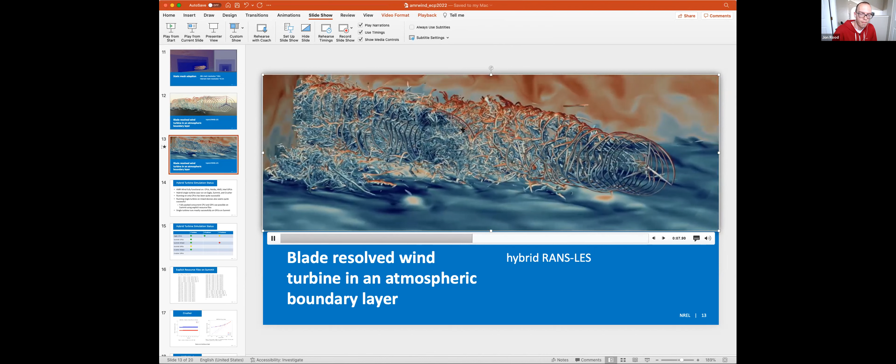So are you in touch with Hojun? Because I think he has been visualizing the compressed files. Okay, well that'd be great. Yeah, I would definitely love to. All right, so I'll send out an email putting the two of you in touch because I think it should be doable - he was doing it somehow anyway. Okay, let me make a note of that. Awesome, thanks.

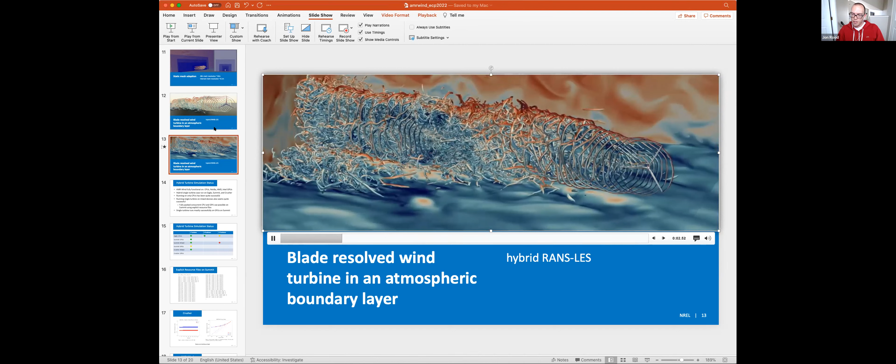Yeah, we have this 1 terabyte plot file and it broke ParaView. I had to send it to Kitware so they could find out where it was breaking ParaView.

Okay, so I'm going to take the position that we're now discussing. So this is the discussion part of the session.

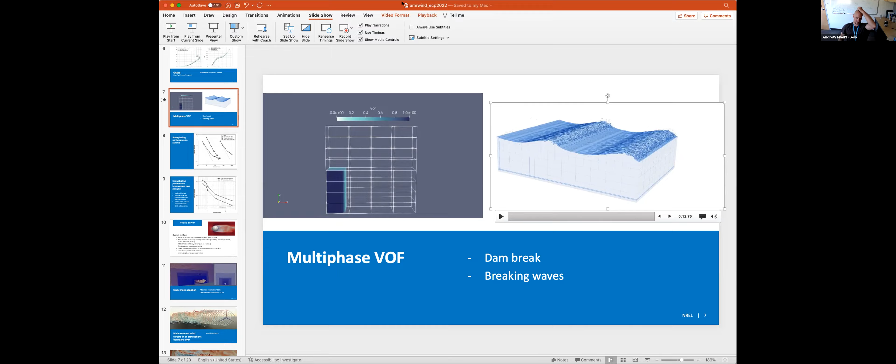I guess one thing I wanted to collect was if there are any glaring performance issues from the AMReX side that are inhibiting your ability to make your KPP goals. And it kind of sounds like the answer to that is no right now. If that's not correct, you should correct me.

However, there was this thing in Mark's talk, and I think you said that this wasn't a showstopper, but there was a big bottleneck in the parallel copy. Yeah, I would reiterate that on AMR Wind too. I think in both of my projects, that's always at the top of the profile in anything we're doing.

So I'm wondering, I know that on the particle redistribute benchmark, I've tried running just that operation by itself on up to all of Summit, and I don't see any kind of spike when you go to a large number of nodes. I'm wondering if we should do the same thing but for just the parallel copy operation and see if we can isolate that. Do you have any comments on that?

I don't know if Weiqun is on the call. Yeah, he is. So I'm just wondering, is it possible it's because of a load imbalance? The problem in PeleC, we definitely see that when there's a load imbalance it exacerbates the parallel copy. But in AMR Wind, we're using static refinement and all the cells are pretty much doing the same amount of work. So in that case, I don't think there's a load imbalance issue, and we still see it, but AMR Wind doesn't do, in my opinion, a whole lot of computation per cell.